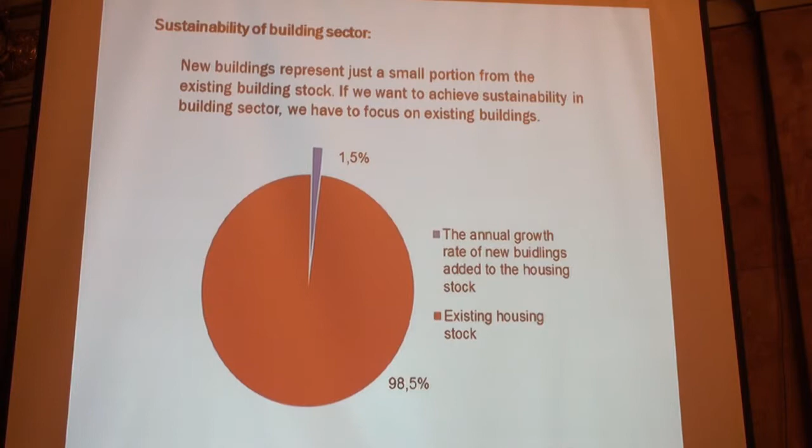As an introduction, I'm sure you're all aware of this fact, but I'd like to stress it: new buildings represent just a small portion of buildings. This chart shows that every year only 1.5% of new buildings are added to the building stock. So the most improvement of buildings could be done on existing buildings. It's pretty clear.

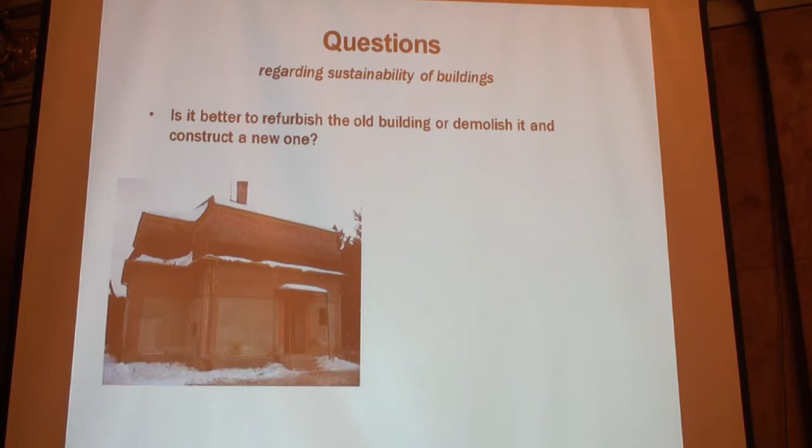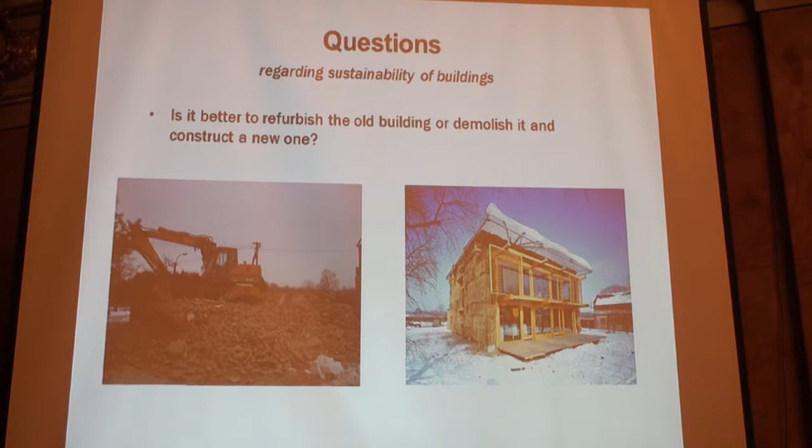So regarding sustainability of buildings, I'm not dealing only with heat demand or ventilation systems. I'm interested in sustainability as a whole. The question we ask ourselves in our department is: is it better to refurbish the old building, or demolish it and construct a new one? Is it more sustainable? There are a lot of aspects covered in these questions.

So we would like to find out the answer. Another question was, what is the influence of a building's operation life on its overall environmental sustainability? If we have a building that has been standing for 200 years, is it more sustainable than a new, perfectly designed wooden building with half a meter of insulation? Is it better? Is it not? Is it more sustainable? Well, the question is pending.

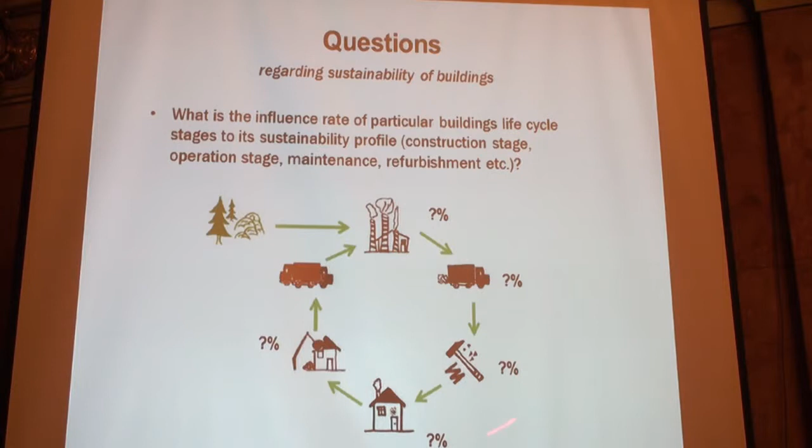Last but not least, what is the influence rate of particular building life cycle stages? Because the building life cycle could be divided into several stages: the production process of the building materials, transport of materials, construction, the operation stage, which takes the longest time, then demolition, and then closing of the cycle. What's the proportion? Which stage has the most and the biggest influence on sustainability?

To find answers to these questions, we use several multicriterion assessment methods that are used all around the world, and in the Czech Republic we are developing our own sustainability tools. All of these tools are based on a triple pillar basis: environment, society, and economy. These are the three basic pillars of sustainability.

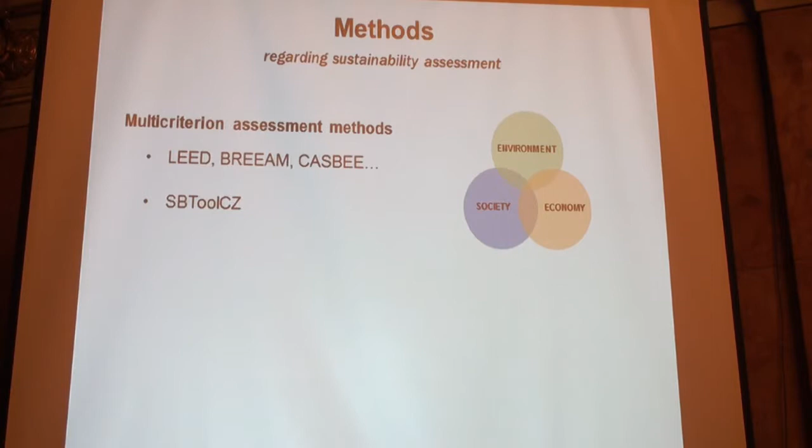As you might know, there are several multi-criterion assessment methods like LEED, an American one, BREEAM, a British one, and CASBEE, a Japanese one. In the Czech Republic, we follow our own regulations and needs, so we are developing our own sustainability tool for buildings. There is also another method that can say if a building is sustainable and tell us what life cycle stage has the most impact, called life cycle assessment.

Life cycle assessment itself is really at its beginning, with a lot of development and research being done. We know a lot about life cycle assessment of particular products, but life cycle assessment of buildings—there aren't many such analyses in the world, and the regulation of how it should be done is new. The life cycle assessment standard for buildings was issued last year.

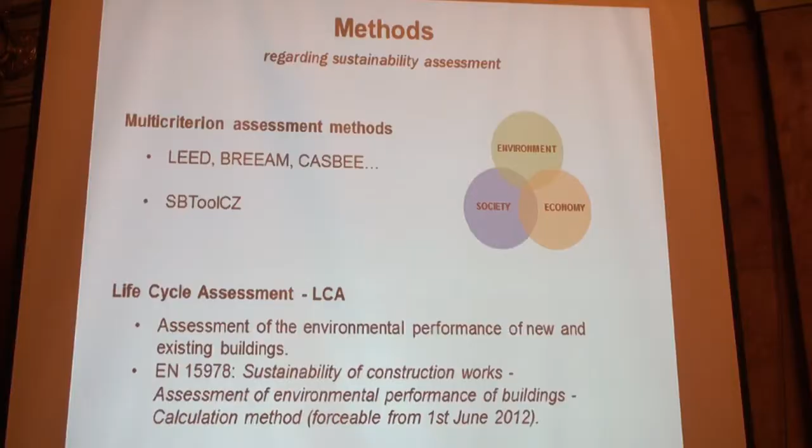Just briefly about the methods used around the world: LEED and BREEAM both have their own schemes for existing buildings. I would say both of these schemes are more focused on maintenance and maintenance assessment—they analyze an existing building and say you can do this and that to improve its performance. But it's not holistic enough from our point of view. These are more facility management tools than multi-criterion tools.

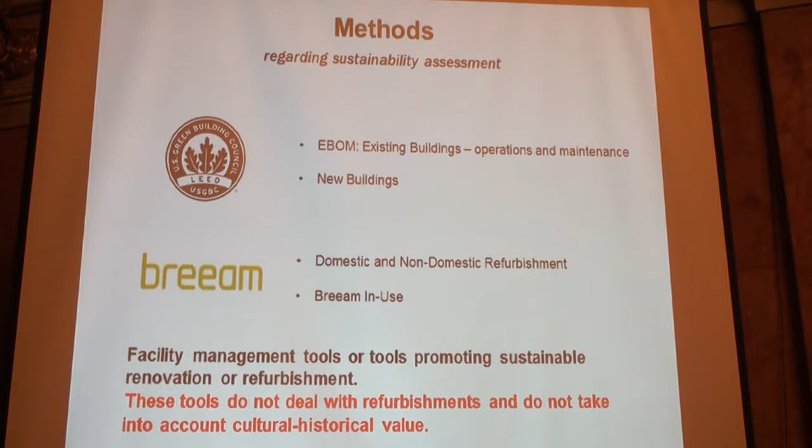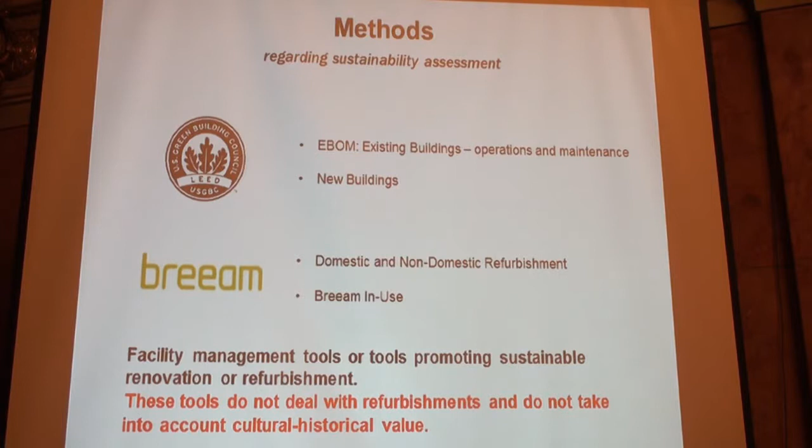And especially, they do not take into account cultural historical value, which is one of the crucial things that influences the possibility of refurbishment.

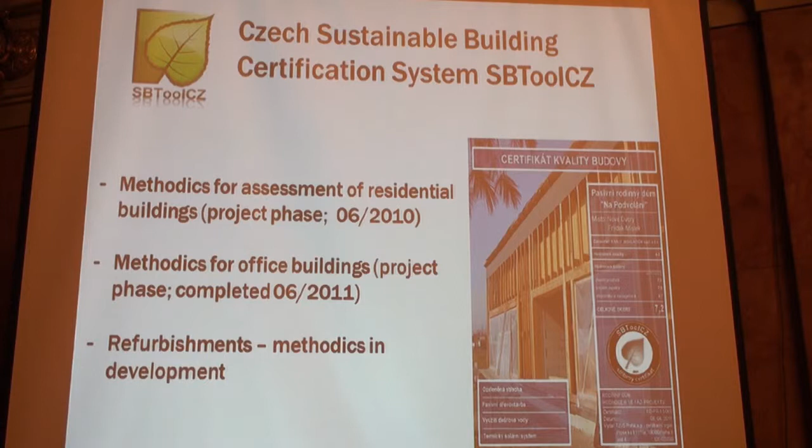Let's say a few words about SBToolCZ. It's being developed at our Department of Building Structures. There are several schemes for residential houses, office buildings, and single-family houses. We've been using it for 3-4 years already. It's also based on these three pillars, and we assess environmental criteria, social criteria, and economic criteria.

These are the weights that these groups of criteria have within the whole assessment. The result is actually one number that aggregates all the criteria and says whether it's good or bad.

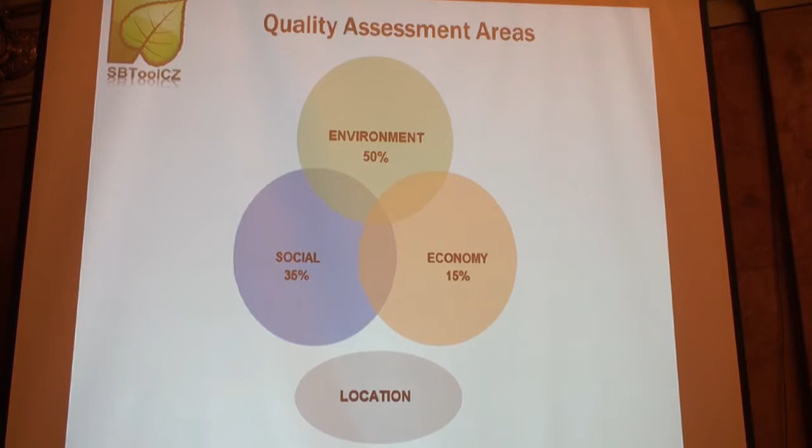Let's briefly discuss the environmental criteria. We want to assess environmental quality, comprising more than 10 criteria, such as acidification potential, global warming potential connected to CO2 emissions, consumption of primary energy, etc.

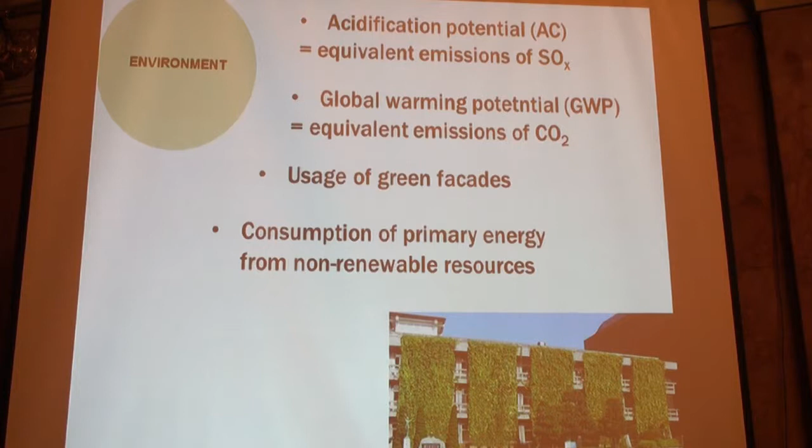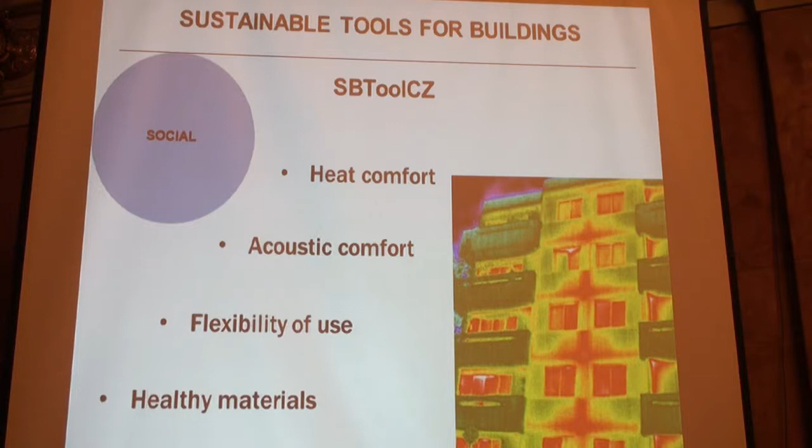In the social group, we assess heat comfort—how the building acts towards the user, whether it's comfortable or not—acoustic comfort, flexibility of use, and healthy materials, among several other criteria. In the economy field, we follow the management process of design and running of the building. Precise documentation is also important, and facility management as well. It's crucial, actually.

If we talk about location, it stands a little bit aside because it's not aggregated into the resulting number, since location is nothing that can actually be influenced. Location is just set, but we can say if it's good or bad. The building itself cannot do anything about the location.

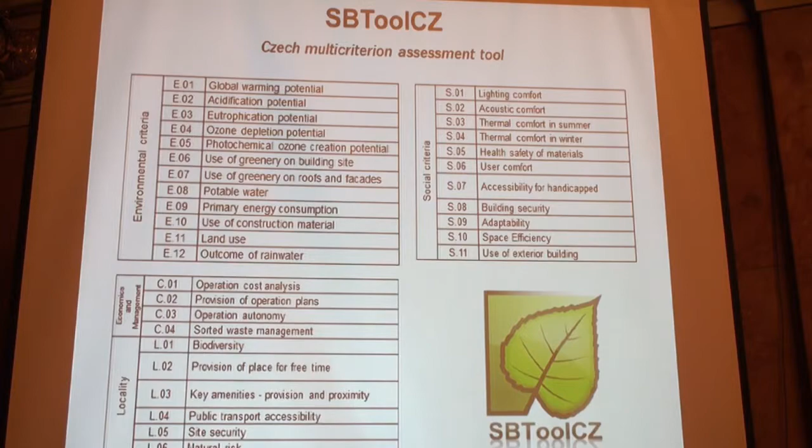This is just an overview of the criteria. It's more than 30 criteria within these 3 main groups, and in each criteria there's a benchmark setup for how you can improve and how you should act to get a better result. If you are in the early stage of the design process of a building, you can use these criteria, or SBToolCZ as a whole, as a guideline to get the best building you desire.

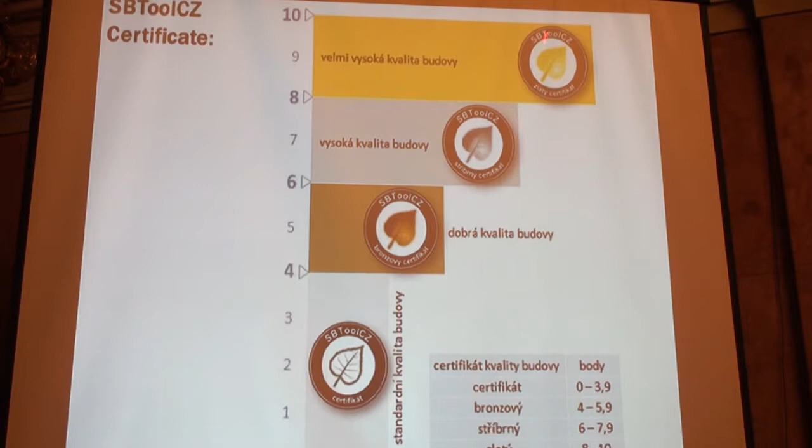This is the scaling. It moves from 0 to 10. The best buildings are marked from 8 to 10 points, and it's all aggregated at the end into one number. If you are the best, you get the golden or yellow leaf.

All right, and this is the certificate for a building. This one got the silver leaf.

All right, if we move from new buildings, because it's pretty easy to influence the design of a new building — you can do whatever you want, actually — but it's quite different with existing buildings. The question is: is it possible to assess existing buildings with the same approach as new buildings?

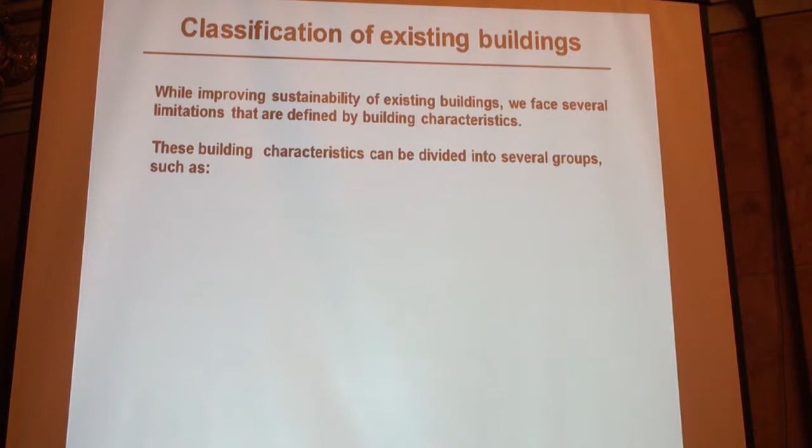Well, let's phrase it this way. We can actually divide existing buildings according to many criteria. We can put them in many groups — according to age, structural type, typology, there are many — but the most crucial point is the cultural historical value.

It influences the quality the most, because within new buildings we are not able to recognize cultural historical value. This value is added to a building within a certain amount of time. It's connected to the development of society and its memory, so sustainability of society is involved. But within new buildings, we are not able to recognize that.

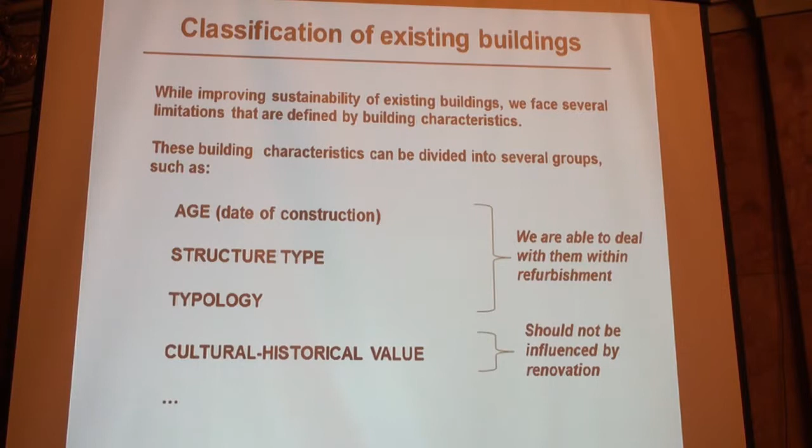With this cultural historical value, in our opinion, this value shouldn't be influenced by renovation. If anything, it should be raised, but not threatened by the renovation.

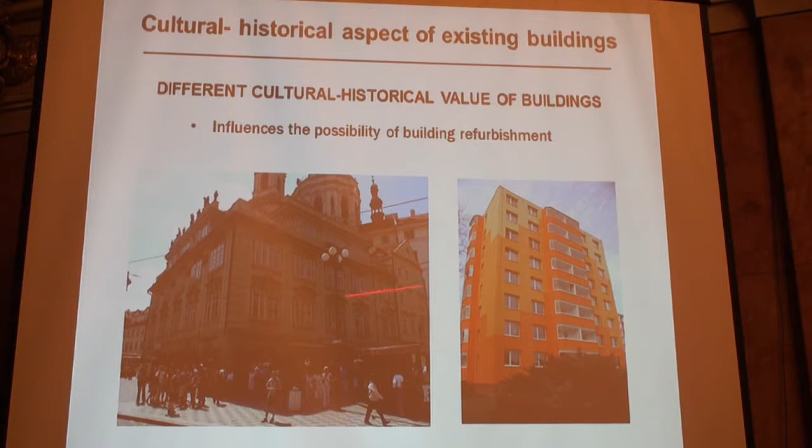If we put it another way, these are two residential buildings. Both are residential, in both people are living, but the distinction is pretty clear. I don't want to expand on this more, but the difference is that in this case we want to protect the sustainability of culture. That's another part of sustainability that is not involved when we assess a new building.

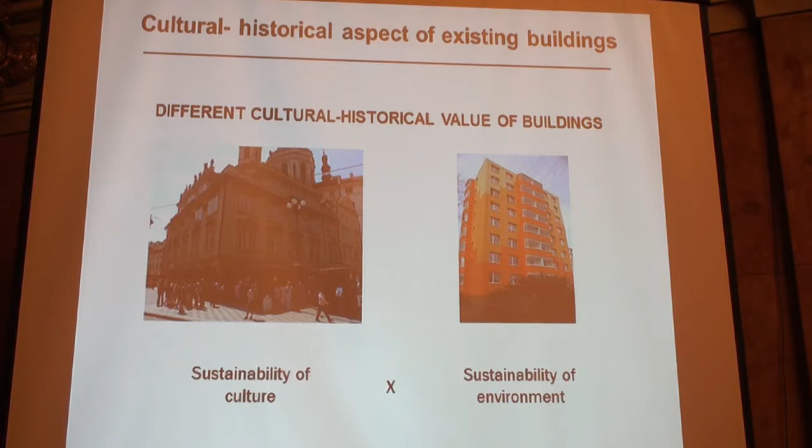So here we assess sustainability of environment and stuff that influences internal comfort, as I talked about with the three pillars. But sustainability of culture emerges here.

So, the categories of buildings — Jan already talked about this a little bit before. We can recognize, let's say, 4 groups. Group A: buildings without recognized cultural historical value. These buildings can even be demolished if we assess them as bad and reconstruction doesn't provide us any good solution. Then there are buildings that are culturally valuable but not listed or protected.

This is a tricky part. Then there could be buildings in a reservation or zone of architectural monuments. If we imagine this as a group, there are existing buildings with cultural historical value, and within this group there are protected monuments and listed buildings. As mentioned before, there are more than 40,000 of these objects in the Czech Republic.

Principles of the reSBToolCZ are pretty simple: we presume that cultural legacy is an inseparable part of sustainability — you cannot take it apart from sustainability. Then, implementation of this quality into the complex multi-criterion assessment of buildings in reSBToolCZ is necessary if we want to properly assess existing buildings.

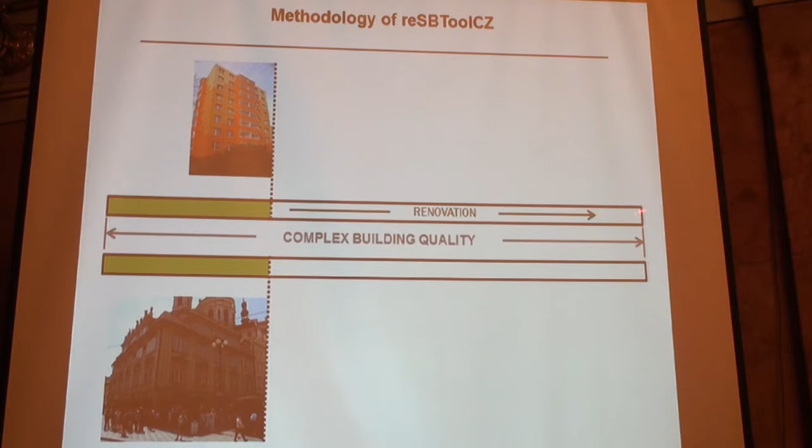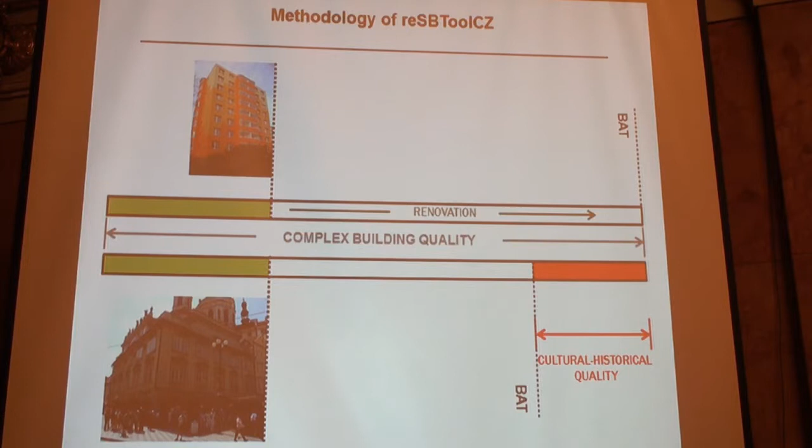We can imagine this on a simple graph, showing the complex quality of a building on this scale. With a building at the beginning, through the renovation process, we can do whatever we want, even complete demolition, to get the best available technology result. But if it's prohibited to demolish the building, the possibilities of changing its conditions are limited, and that's the point where cultural historical quality emerges in this field.

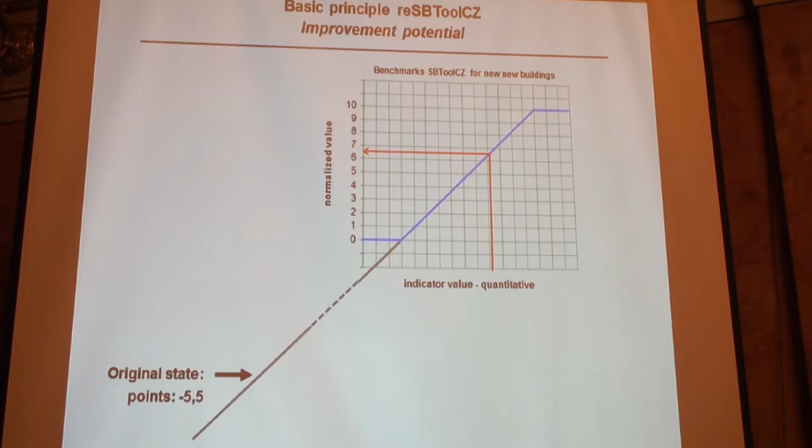If we transform this approach into a benchmark setup for a criteria in the environmental group, this is the indicator: what level a building is at determines its points. If we look at a building with cultural historical value, its performance is really poor, and even doing the best we can, it doesn't even move over the 0 value. So what should we do? We just define the improvement potential, which allows us to adjust this benchmarking process, and that's how we implement cultural historical value in the assessment.

We are not actually assessing that this building is better than the other building - no, we don't want to do this because it would be confusing. So we make another benchmark setup where renovation moves here and gets some points - this is the reSBToolCZ approach.

But if the building doesn't have any cultural historical value, then this improvement potential approach is not eligible - you cannot use that. So we use the same setup as for new buildings. The situation could be the same: an existing building without value is here, and if we do whatever we can, we move here and get 0. Then the reasonable result is that it's maybe even better to demolish it and build a new building.

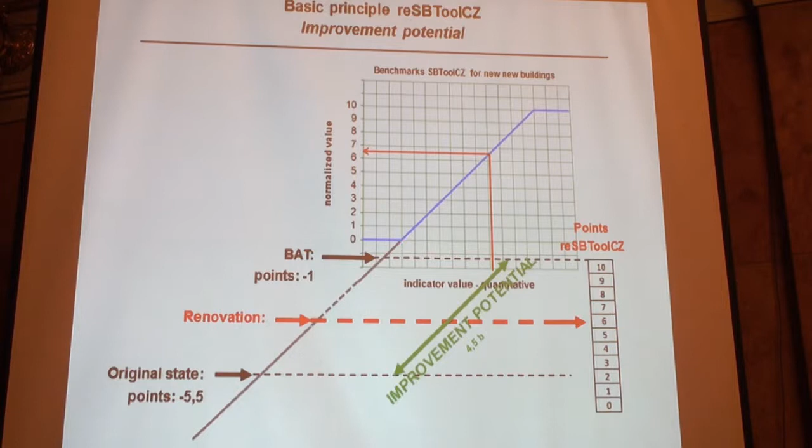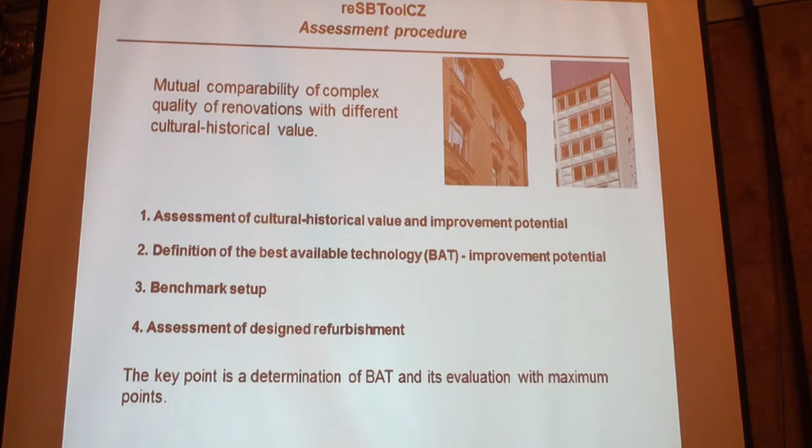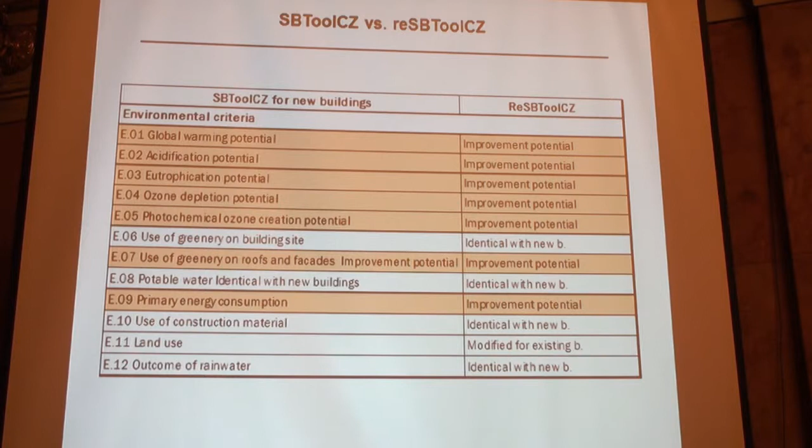There were several case studies, and this is the scheme of how we do the assessment: first we assess the cultural historical quality, define the best available technology improvement, set up the benchmarks, and then assess the building. This improvement potential influences only several criteria, mostly in the environmental group, connected to the envelope and the quality of external walls, windows, etc., as mentioned before, and also user comfort.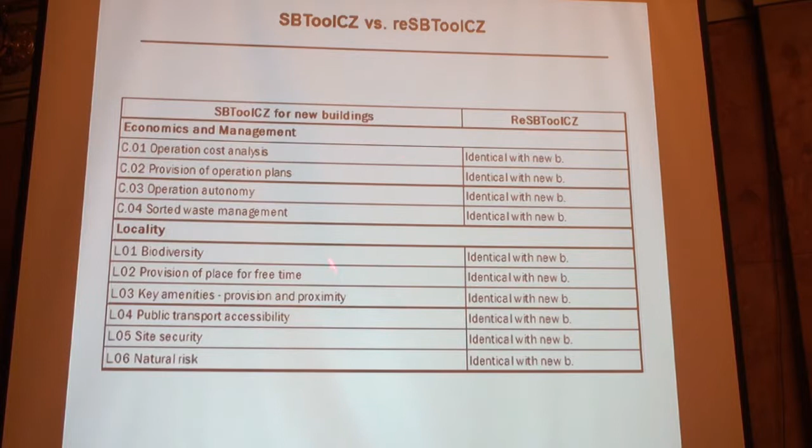In economics and management, we use the same setup as for new buildings - there's no need to change that. To the case studies, we have made several. These are some of them: first is a two-family house without cultural historical significance, the second is Maitrea.

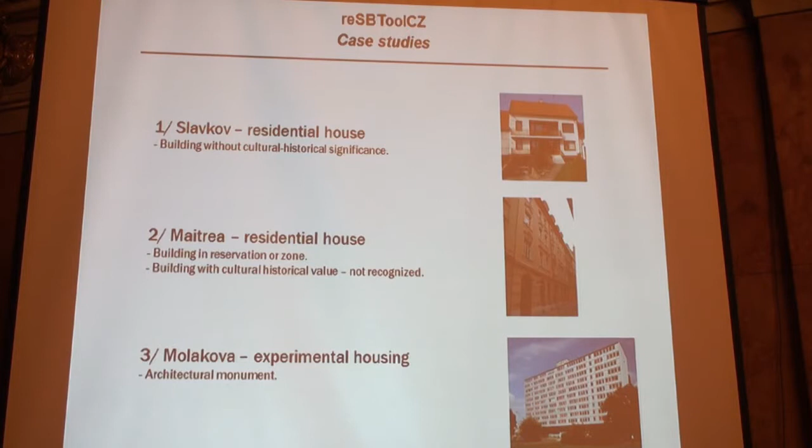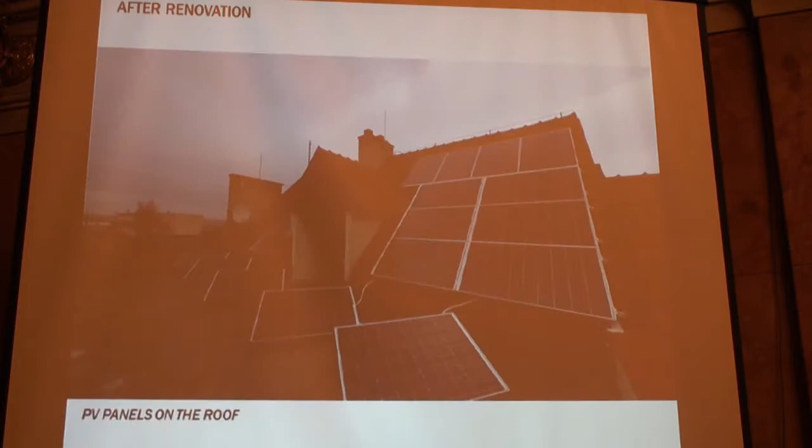Jan already talked about Maitrea. And Molakova - this is experimental housing from the 60s, an architectural monument. This is the original state. The building's heat performance was improved, and PV panels were installed on the roof. These are the parameters - I'm not sure it's necessary to expand more on that.

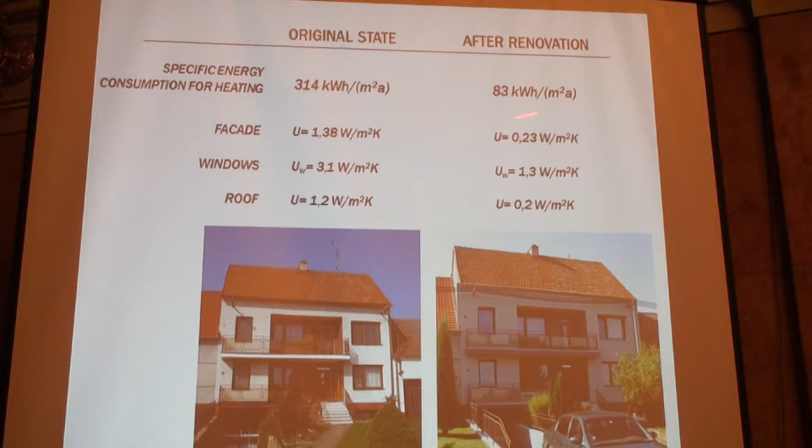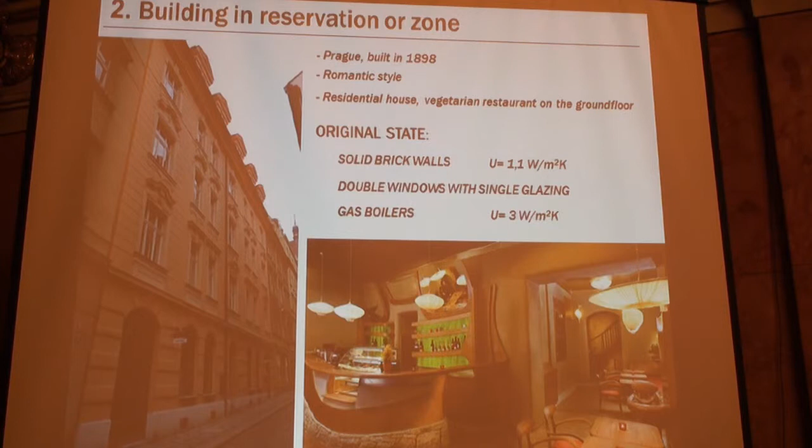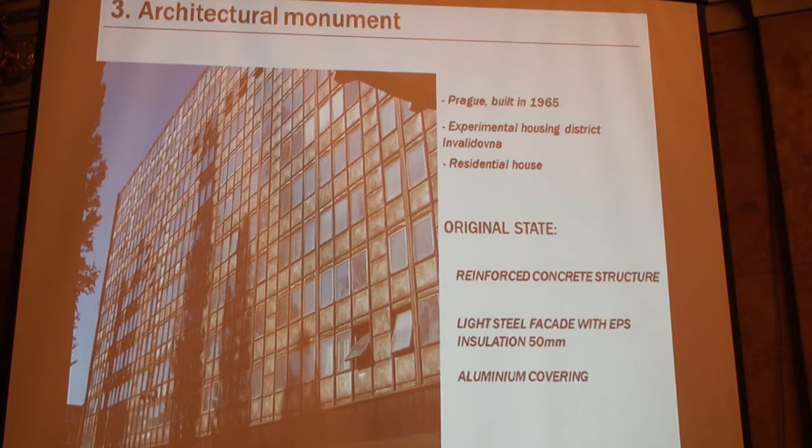The improvement of heat or energy consumption is clear. To the other case study, Maitrea: windows were changed, internal insulation was installed - Ofatex from reed. This is experimental housing with a protected aluminum facade, built in 1965, presented in Montreal Expo by our famous architect. And this is the result.

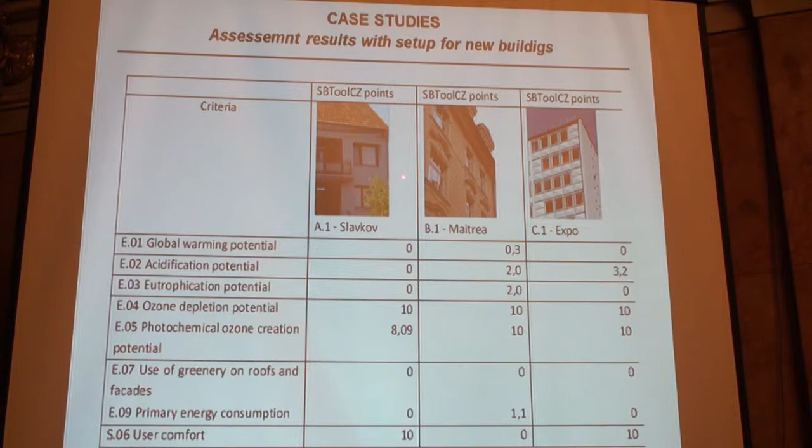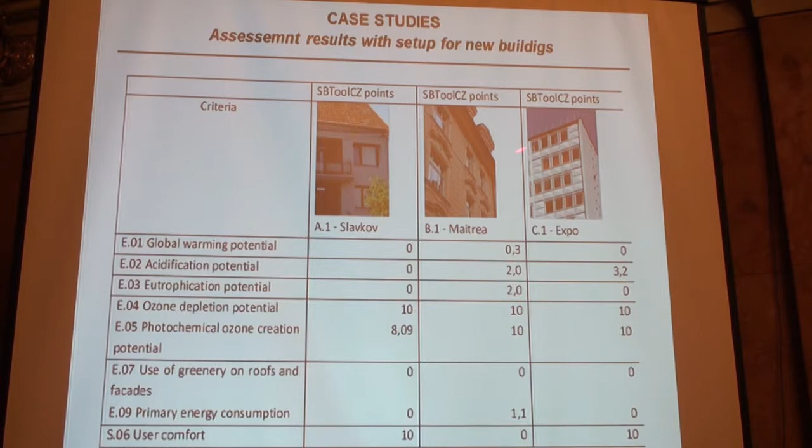These are the results if we use the same assessment setup as for new buildings, and the quality of these buildings within the criteria influenced by improvement potential is pretty poor. We could interpret this as the building, compared to a newly built building, being really poor. But in this case we should involve the improvement potential, because cultural historical quality has been recognized and should be taken into account.

If we use this approach in reSBToolCZ, the results change rapidly, and you can see that we assessed the cultural historical value somehow - we put the importance of preserving this building into the assessment.

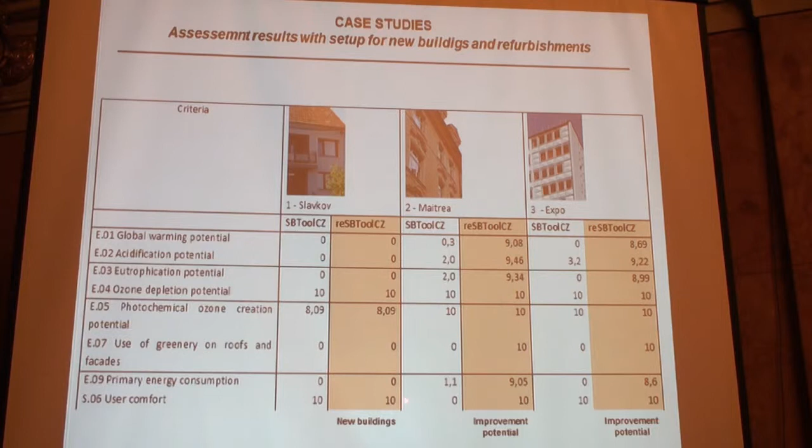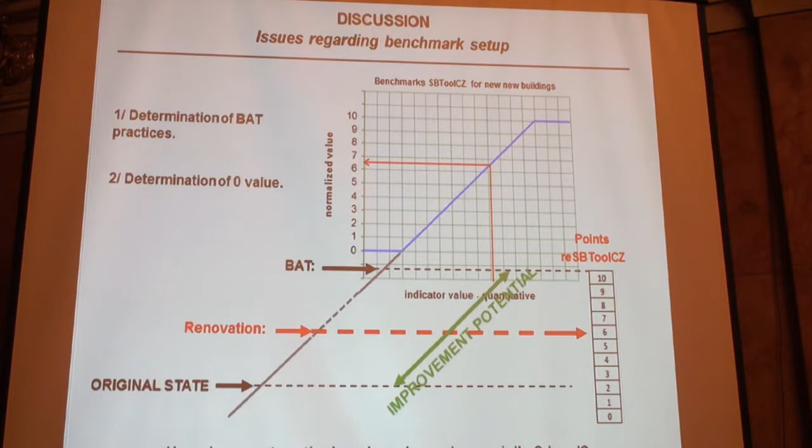And again, how it's done, we have to determine best available technology and determine the zero value level. How much time do I have?

Okay, the last part I'd like to expand on a little bit is life cycle assessment. Life cycle assessment was defined for buildings by a new European norm.

Within our team at our department, we want to find the difference between simplified and complex LCA analysis, because SBToolCZ, LEED, BREEAM use simplified LCA analysis. That means it doesn't cover the necessity of refurbishment of certain material, it doesn't cover transportation, and it doesn't cover the potential lifespan that could be influenced by the real technical state or this moral lifespan.

So we want to find the answer by making a complex LCA analysis on a case study where we will model the whole life cycle. It's going to be a really robust model of the life cycle of a building, and we'd like to find the answers to these questions, then adjust SBToolCZ according to the results.

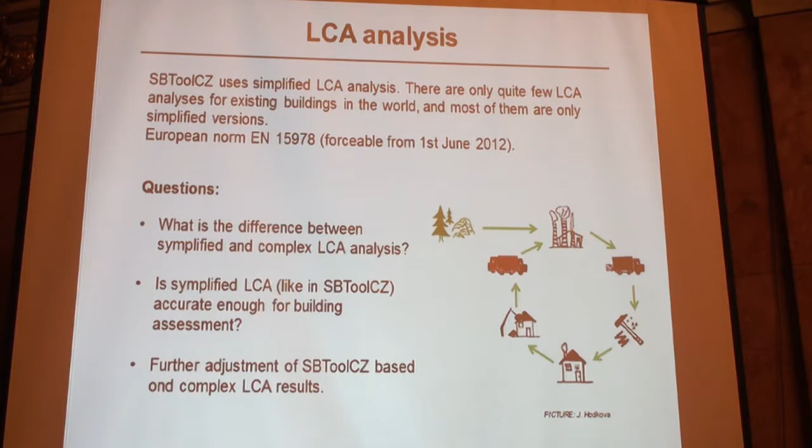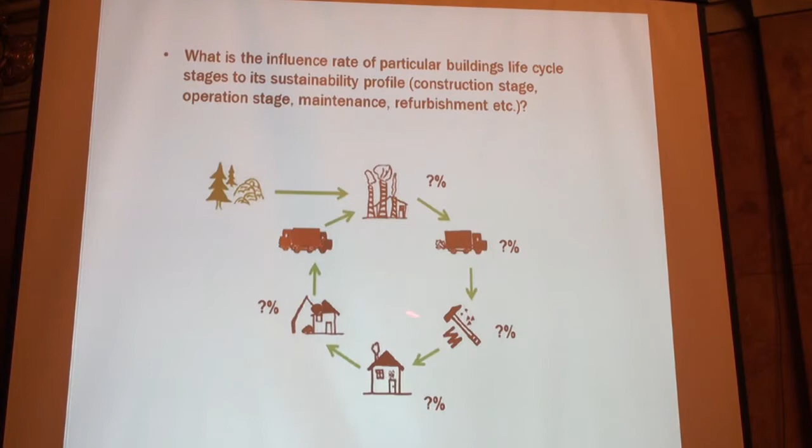Again, with this graph, we want to find these proportions - what's the main stage, which stage has the biggest impact on the life cycle?

If we look at the norm and how much work it comprises, it's going to be a lot of modeling and creating a lot of scenarios. In the rows, we can see parts of the buildings like foundations, lighting system, etc., and here are the modules of a building, like the product stage of certain materials.

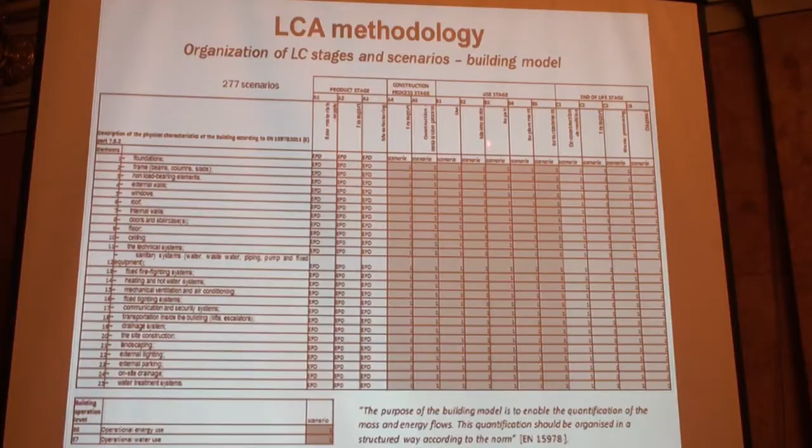We can get data that will tell us about their environmental quality impact from EPDs. Then there's a construction process, and the use stage comprises using, renovation, maintenance, and for each of these rows we have to make a scenario.

That will tell us how we deal with this part within renovation after 20 years, and it's connected to several inputs. It's going to be a massive model comprising over 200 scenarios, and hopefully it will give us the answer to the questions we ask ourselves.

The most tricky parts are like what's the service life, because the service life of a building is influenced by moral service life and technical service life. Are we even able to define this? Are we wizards? Can we say that the building will last only 30 years or 300 years?

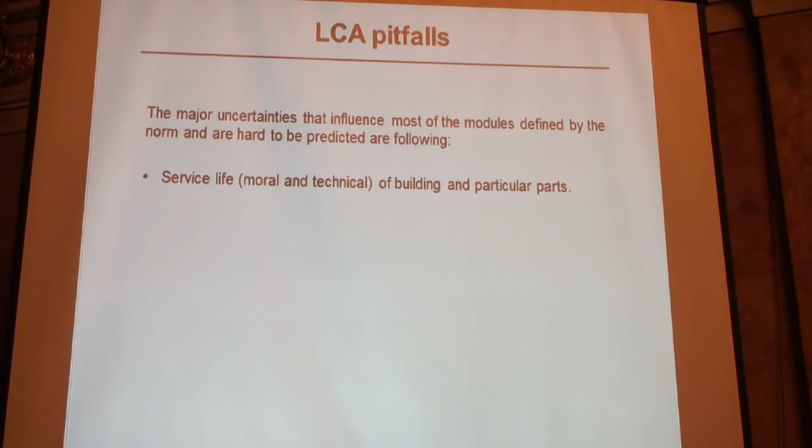We want to make this sensitivity analysis about how the service life influences the whole impact, and I'm getting back to that question from the very beginning - is a building with a 200 year old structure more sustainable than a new one?

Then we can also change the use of the building and how it influences the life cycle. That's another tricky part - social and urban changes, we are not able to predict them, technological progress in transport, and all the progress in science. And also we have insufficient data on environmental performance of materials.

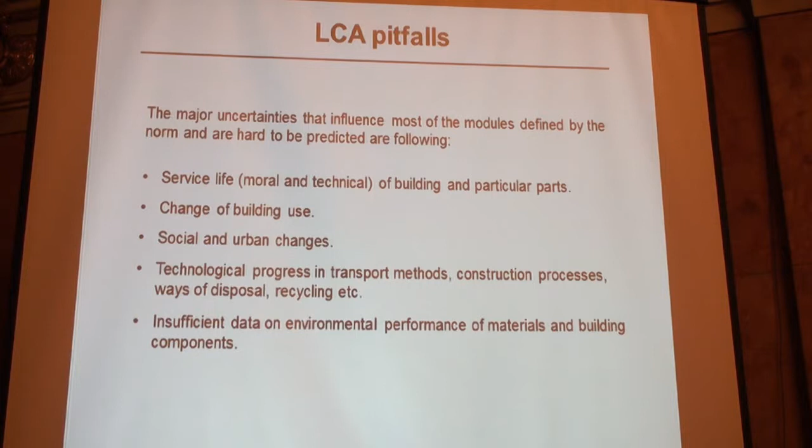So these are the questions that we have to face, and it's going to be a really tricky part. And climate changes, we can predict them, but not accurately enough.

So the result of our thinking recently is that the LCA should be, and it's pretty clear, made only with known data and clear background. As I see it, it's possible to look at the building sector as one entity and assess its impact on environment at a certain point of view. The predictions - if you get into predictions, you lose your credibility and accuracy.

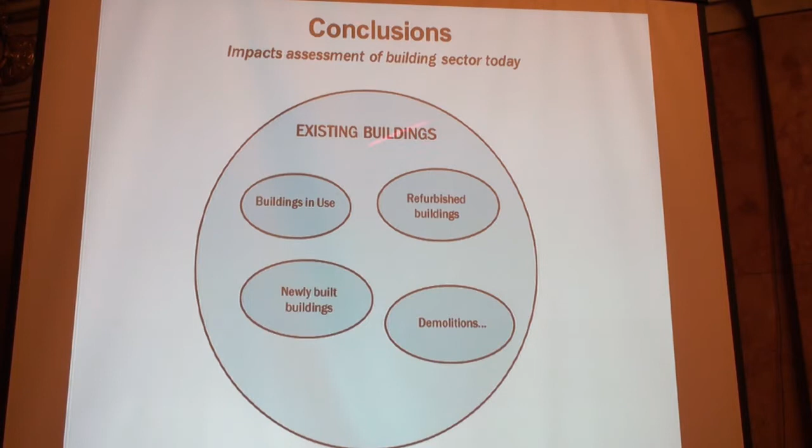This is just a model as I see the existing buildings and the building sector. It's all one group, and we should assess this as one group. And again, we are not able to predict the future of the building sector, so we should focus on what we have now and analyze it into really thorough detail.

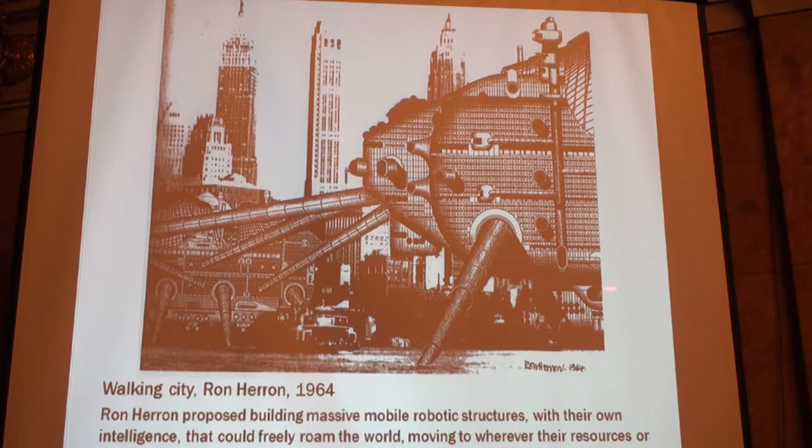And for the end, this is an example of how good we are at predicting the future. This is an Archigram concept from Ron Herron, 1964 - these walking cities, it was his picture of walking cities. The people live in these small cells, and this huge construction walks around the world and exploits the resources, moving from land to land to get the resources for its living.

So I don't think we're heading this way, and that's why we would like to avoid predicting the future. Thank you very much for your attention.